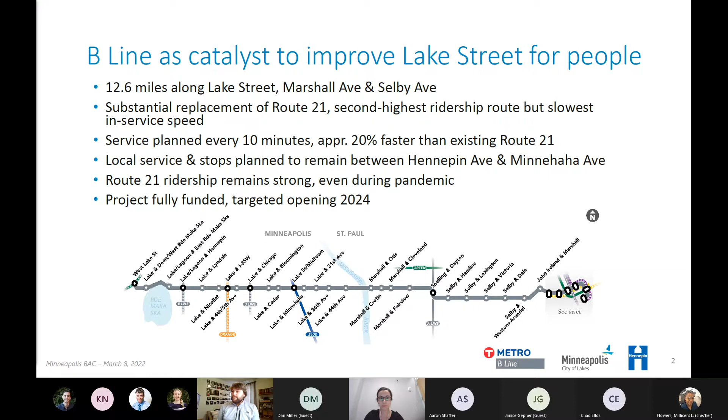There is a plan for local service and stops to remain between Hennepin Avenue and Minnehaha Avenue in Minneapolis. The project itself is a $65 million project, fully funded through federal, state, and Metropolitan Council funds, with a targeted opening in 2024.

Next slide, please. Thank you. On this slide, we have a number of different ways that Metro Transit and our BRT project provide a faster trip. The B-Line is planned to stop at 33 locations along the route, 16 of which will be in Minneapolis along Lake Street. The stops are going to be about 0.4 miles apart, or about 2 to 3 stops per mile, to help balance speed and access. These stations were designed with things like limited stops, pay before you board, curb extensions, and some transit advantages we'll talk about later in the presentation.

These are really designed to provide a faster and more efficient service, along with amenities that help improve the customer experience, things we've heard from our riders and customers that they really want to see. Stations will include a number of amenities, including heat, light, real-time information, some security features, and a higher priority of maintenance.

Next slide, please. In terms of schedule, we've been engaging around the Metro B-Line project since 2019, so it's been underway for several years now. We released a corridor plan in 2021 with significant public engagement throughout the entire year, receiving hundreds of comments that we incorporated throughout the planning process. We released a draft plan and then new recommendations, finalizing it in October of 2021. We're currently in the design and engineering phase, have been since fall of 2021, and will continue that throughout the rest of the year, with construction set to start in 2023 and go through 2024.

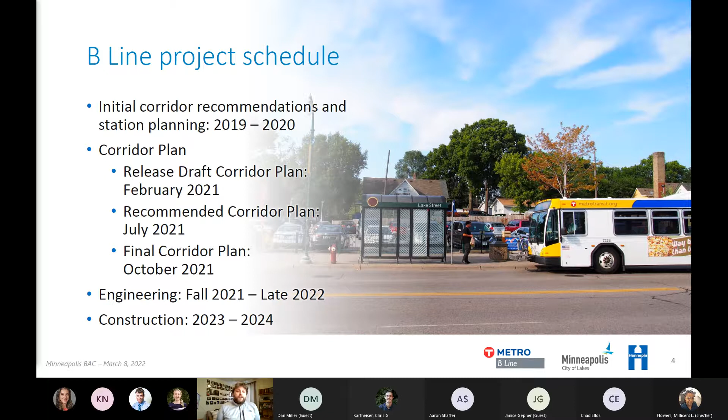Jasna Hadzic-Stanek with City of Minneapolis. I'm going to pivot from the B-Line BRT project to talk about the Lake Street improvements, starting with a little background on Lake Street.

Lake Street, also known as County Road 3, is a major east-west thoroughfare connecting Minneapolis to St. Louis Park and the chain of lakes to the west, and St. Paul and the Mississippi River to the east. The corridor is owned and operated by Hennepin County, but the City of Minneapolis manages the traffic signals, making interagency coordination essential for this project.

In addition to all the great things along Lake Street, there are also many challenges. For example, Lake Street is one of the highest crash corridors in Minneapolis and in all of Hennepin County. It's been identified as a high injury street in Minneapolis's Vision Zero Action Plan, and 8% of all crashes occur on Lake Street.

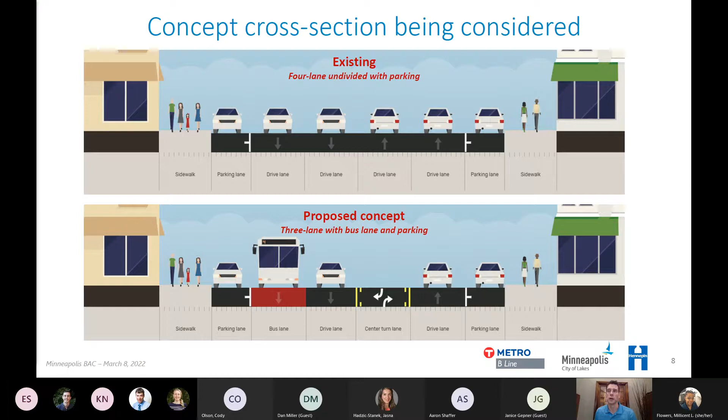Outside of the station platform locations, we plan for minimal impacts to parking, sidewalks, and the existing curb bump outs. So mainly just new pavement and new striping between the curbs.

So this graphic is meant to show that we are proposing over 6 miles of bus lanes in this concept between Dean Parkway and the Mississippi River. The majority, over 5 miles, in the westbound direction and a little over a mile in the eastbound direction. Those are represented by the red lines on this graphic.

Bus-only lanes are shown in each direction between Dean Parkway on the left, where the red lines start, and through the one-way pairs of Lake and Lagoon. And then east of DuPont, mainly dominated by a westbound bus lane between DuPont and the Mississippi River.

You'll also notice on here there are some short gaps, mainly highlighted in yellow, that require further evaluation. These are locations where the transit and traffic modeling suggested significant delays to overall intersections from the traffic analysis.

So right now we are proposing, and you'll see this in a future figure as well that we'll show you today, retaining dual westbound lanes for general purpose that the buses would also be in. But with this, we recognize that we'll need to do additional traffic counts and further modeling and observation to consider future changes.

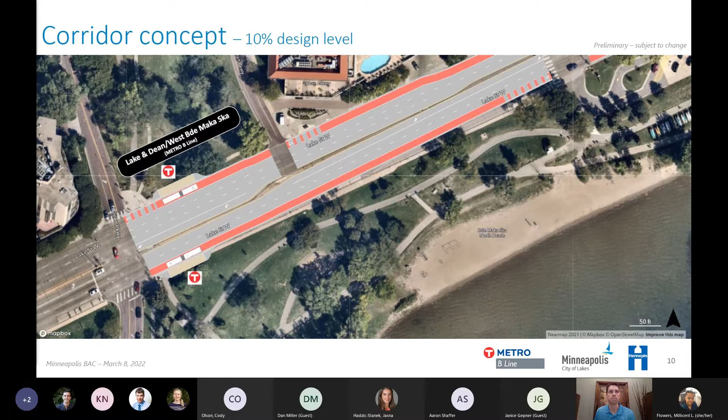So next is a representative look through the one-way pairs of Lake and Lagoon, where you'll once again see the outside lane designated as a bus-only lane in each direction. Given that the segment was not reconstructed in the 2007 through 2008 timeframe, we are also looking at the installation of curb bump outs to further enhance pedestrian crossing safety by minimizing

that distance and exposure. There is a yellow box here mentioning that further review is needed for Lagoon Avenue lane configuration and parking. There is some off-peak parking allowed on the south side of Lagoon that needs further evaluation to determine parking needs throughout the day.

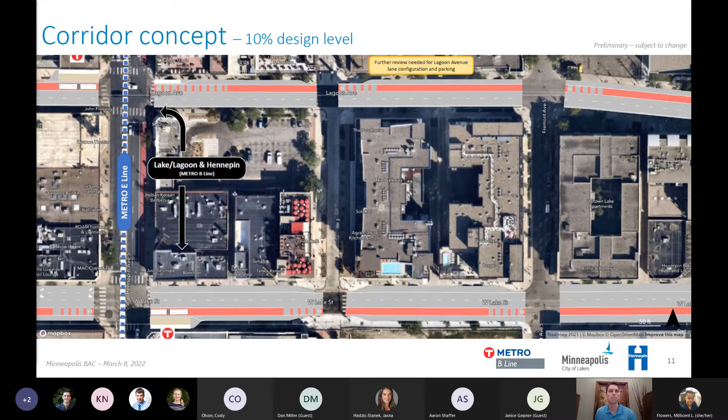Next is at Interstate 35W, where the project was recently completed by the Minnesota Department of Transportation. Stations were constructed already, including the Nicollet Avenue station, the Interstate 35W station, and the 4th and 5th Avenue station. So minimal revisions, mainly consisting of striping changes, are proposed through this reconstructed segment from Blaisdell to 5th Avenue. As shown on the screen in yellow, further agency coordination is necessary with the Minnesota Department of Transportation to determine the feasibility of restriping and having bus-only lanes through this area.

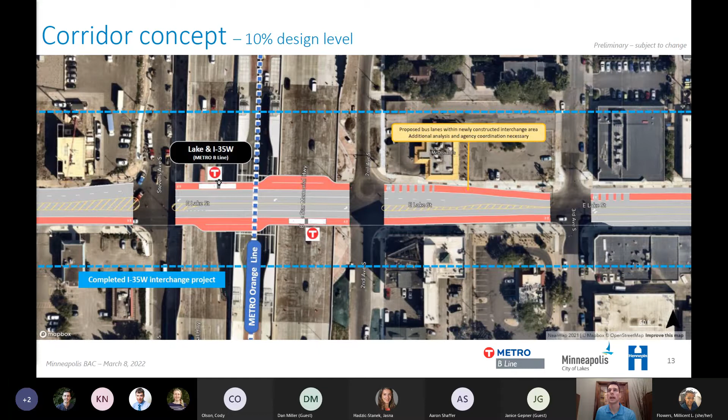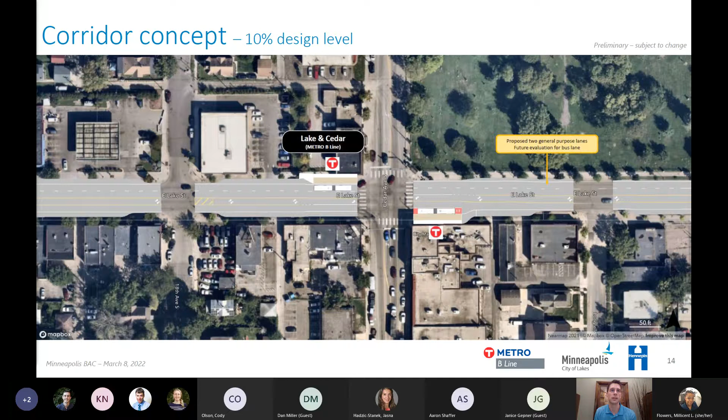Next is the Lake and Cedar intersection, which also presents unique challenges with the need to improve safety and address traffic and transit capacity. Similar to Hennepin Avenue, we envision far side platforms and a bus pull-out bay in the southeast quadrant. Again, due to the need to balance transit and traffic operations, a dedicated westbound bus lane is not currently envisioned in this concept, but we'll continue to study its potential through this intersection as well.

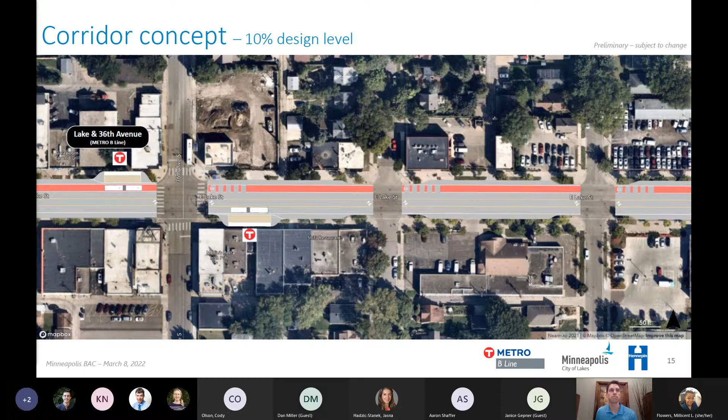So I'd like to transition now to upcoming engagement and communication efforts. As mentioned previously, public feedback was received through recent past engagement efforts, and we also reviewed, monitored, and analyzed crash data and incorporated this into the planning process. More than 800 comments were received from the B Line corridor planning, and thousands of people and residents were heard through Minneapolis's outreach for the Transportation Action Plan, Vision Zero Action Plan, and the Minneapolis 2040 plan. So the common themes from all that engagement that apply to this corridor are a desire for more, improved, and faster transit, a desire for quickly improving safety on high crash streets, and a desire for pedestrian improvements along and across busy corridors.

We recently launched a Hennepin County webpage to communicate this information and share our shared agency vision for the B Line bus rapid transit on Lake Street. Agency staff will also be following up with the impacted neighborhood organizations, with a planned virtual open house currently set for next Wednesday, March 16th. So we are trying to get that information up on our website and get that out to our neighborhood groups.

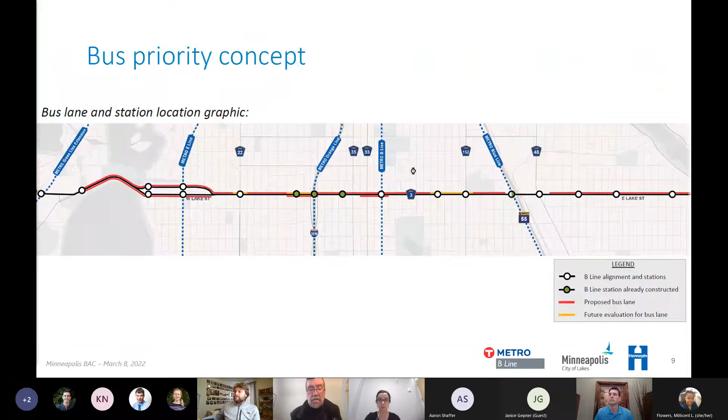Hey everyone, this is Alyssa Shuffman, Ward 9 rep. Very excited about a lot of things you've shared today. I'm a regular user of the 21 bus and really excited for these improvements and all the hard work that's gone into this plan so far. I think a couple things stand out to me. I think it was Cody who came and presented about the B-line a number of months ago, when full-time bus lanes were still under consideration. I'm disappointed that we don't have full-time bus lanes.

I know staff have been clear about their reasoning for not having full-time bus lanes. But I'll note that part of that conversation really focused on the potential for bike improvements on the corridor in certain areas, and that was part of the reasoning we couldn't have full-time bus lanes along the length of the corridor. So it feels like some of that conversation got dropped, because we're not seeing any of that in the presentation today.

And I'll just continue to highlight that, while this is a really, really big improvement to bus service on Lake Street that I'm very excited to use, we have goals as a city to double transit ridership in the next 8 years. To double transit ridership, we need to move away from that level-of-service model of thinking and assuming everybody who drives on Lake Street right now will continue to drive in the future. So I want to push our thinking around how much space we dedicate to traffic and car travel and drivers, and encourage us to give as much space as we can to buses and bikes. Those are my two big picture observations, not necessarily things you need to respond to, though if there's anything you want to respond to, you're welcome to. Thank you again for being here.